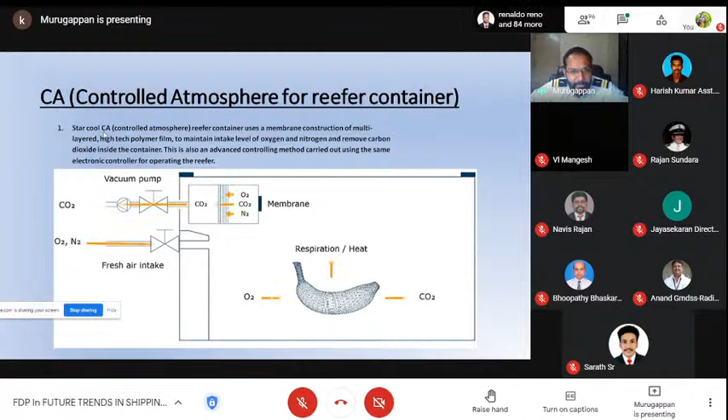And super freezing containers are also being used nowadays. These super freezing containers, which you can see in the reefer itself, can be maintained at minus 20 degrees to minus 60 degrees, and have 3 compressors, 3 evaporator fans and condenser fans also. Sorry.

Nowadays, with COVID-19, everyone knows there is a very essential medicine required which has to be maintained at minus 70 degrees. So when transporting the medicine from other countries, the shipment has to be maintained at minus 70 degrees all the time. If the temperature is not maintained, the medicine is going to get damaged. And I just read an article that if the medicine does not maintain minus 70 and the temperature rises, it should not be used for any person, and it should not be cooled down again and used for a person.

If it is used, it can have a major impact on the person who is injected with the high-temperature medicine. So in this way, this is going to be very useful also. And every piece of equipment here is controlled by the controller. Normally we have only one compressor, one evaporator and one condenser fan, which is the normal method of running the equipment to cool down the system. But this is advanced, having many components to reduce the temperature.

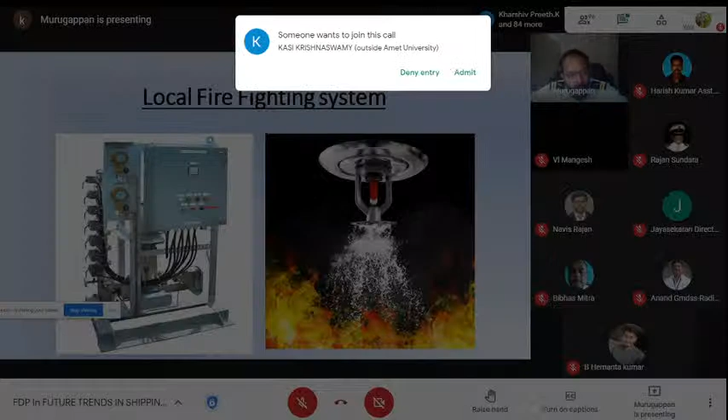If both the sensors activate together, a fire is there and smoke is there, then what will happen? The control is given to the auxiliary of the local firefighting system. This is the local firefighting system, which has a separate pump and a motor with a separate solenoid. Actually, the use of the solenoid is: in whichever location the fire has happened, this solenoid will get energized by this controller. So it is going to put off the fire by using a sprinkler. We'll just see how it is going to put it off.

As we said, if it happens during the night time, if two fire sensors like a flame sensor and a smoke sensor detect together, it will start to spray the sprinkler by the auxiliary contacts of the fire detection system to the local firefighting system. It is set in that way. So the major places where fire could happen are the boiler, above the generator, above the main engine, and the incinerator and purifier room. These are the places where we have oil, oxygen, and heat material. So the possibility of getting a fire is very high. So the fire detection system is going to detect properly, and then activate the sprinkler to put off the fire. So even without human presence, this is going to happen.

So this also comes in the small part of the control system for advanced control for the shipping industry. Actually, this system was implemented very long back, but it is still in the modern ship. So I just want to inform you.

And the speed control of the motor. Actually, most seamen will know about the speed control for the mooring winches. Normally, in the olden days, we used to operate the mooring winches with a hydraulic operating method, where the motor is there and the hydraulic system operates the mooring winches. So the ropes are sent for tying the ship to the jetty. Then later on, what happened? They tried another method, the pole changing method. The motor's poles can be changed using contactors, relays and timers.

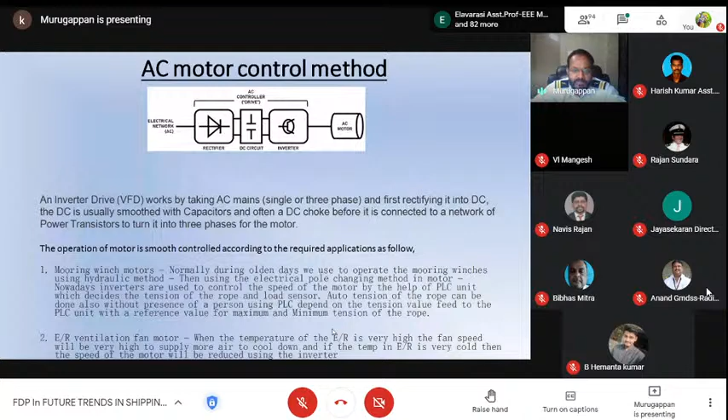So they decided to run the engine room ventilation fan to maintain the temperature in the engine room. This is a small thing, but it has many impacts inside the engine room. That controls a major part in this controlling of the motors.

Okay, and we go to another topic, the refrigeration leak system. On ship we have the air conditioner system, the provision system, and in the galley we have the reefer freezers, and the places where we store the refrigeration bottles. If anywhere there is a leakage during the night time or the person is not there, they have to know there is something wrong with the refrigeration gas. Similar in our house, we have AC. Mostly before we had R12 or R22 gases, which are very harmful for human beings. Nowadays they have stopped these gases, but still some places are using these kinds of gases, which are very dangerous for the ozone also.

So when there is a leakage of the freon, the sensor has to detect it, right? So this is the sensor, and it detects the level of the leakage and gives an alarm. The alarm monitoring system gives it to the engineer rooms, and they will approach the location, and if it is possible to stop the leakage, they can do it. So this is also a part of the control, how they measure the leakage, and that is controlled and monitored from the alarm monitoring system.

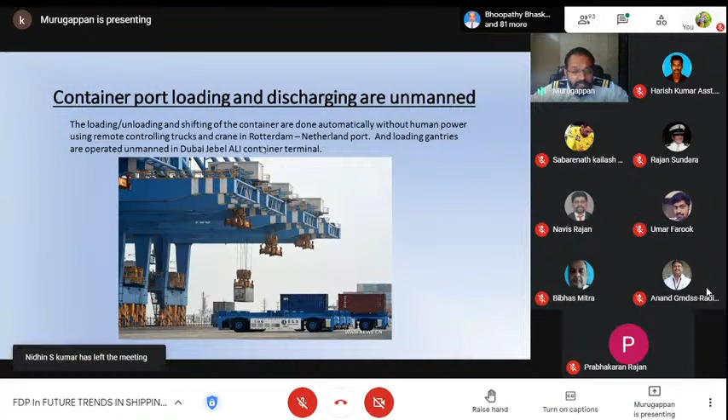The crane also, the loading and discharging crane, I have just seen in Jebel Ali port carrying 4 containers at the same time with a sensor detecting how to heave up the containers, and this loading and discharging of containers is also being done with remote operation. Sometimes if the ship is not urgent in loading and discharging, they will just drop it as an automatic control, and they will leave the location, and they can stay anywhere and control it by remote control or some software and applications. So by this way, the advanced control system is going to be very useful for the human being as well.

Actually, I just thought of playing a video. I tried to find a video. You can just see this short video because it looks good, and I feel it's good to show you also.

That's all from this video, and some of the control circuits which I have seen here. We have seen a lot of control systems that are going to be implemented, and useful for humans. Main engine related control systems also, if time permits, let us discuss very little, fast.

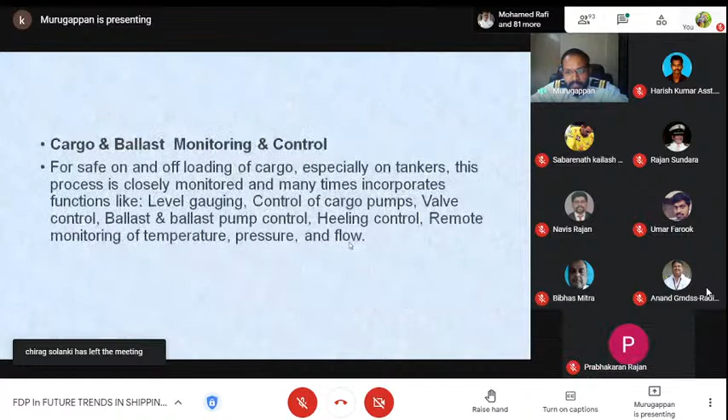Actually, for the control system, we have a control system in the main engine. One second, I think a video is playing.

We have seen for many systems how it is going to be helpful for the advanced control. Now let's see a few words about the main engine, how the control system is going to help with electronic sensors and automation. This kind of thing is helpful for an unmanned ship, and nowadays autonomous ships are available also. I'm not going to brief more about the autonomous ship, but I'll just give the current situation.

Actually, there are some ships already sailing in the sea as autonomous ships without a human being, but this is not going to work 100%, because a human effort should be there at least a few percentage. Without that, accidents can happen, and the transportation of the shipment is likely to be delayed. So they are trying also, and slowly they will be getting some information about the drawback sectors.

During the night time, you just select a button and go for a good sleep, and duty engineers will be getting the alarms. Only duty engineers are going to get an alarm, showing what kind of alarm is displayed in this cabin, what equipment has a problem, and what kind of alarm it is. The necessary action isn't given directly, but you have to be present there to know what the problems are and the rectification you have to carry out.

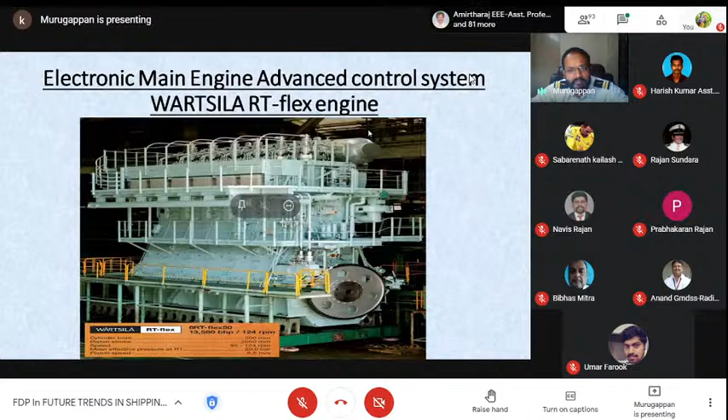We'll just see what are the components of the hydraulic system in a brief manner. I don't want to elaborate, it takes a very long duration to describe this engine. For this engine, the major part is going to be the electronic unit for each unit.

Each unit is going to have a separate PCB, called an FCM20, that is flex control module, which is going to control the activities of each unit separately. Each FCM electronic unit is also going to be helpful for communication from the bridge to the control room, from the control room to the engine control, and from control to the local control also.

This PCB is going to be helpful, and all the sensors are going to be connected with these PCBs for the safety and control of the engine, but not a few other sensors like leakage sensors or some other sensors which are not relevant to safety and control. Those are not linked with these PCBs.

So what are the major components? We need fuel, right? So we get the fuel to a supply unit, which is going to pressurize the fuel, and it is going to give it to the unit. Before giving it to the unit, what is happening, I will describe in the next slide.

And also a control oil, which is going to be helpful as control oil and servo oil, which is going to help in pressurizing the exhaust valve. This is going to be the exhaust part, just opening and closing. What is the need of this exhaust?

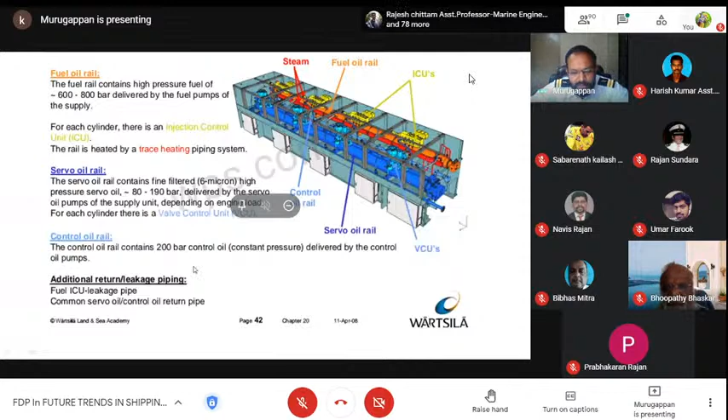Actually, this is the fuel supply pump which I was telling you about. What are the electrical components and how it is controlled? I'll explain. These are separate individual pumps - we have around 6 pumps in this system, and each pump has a separate temperature sensor.

If the temperature is less, it will alert the alarm monitoring system that this particular pump's temperature is low. How can it be low? If this pump is not operating, the temperature will be very low. It can be very high if something is really wrong with the mechanical parts inside the pump. So the temperature sensor lying in the pipeline will give an alarm and control the engine. If it is very low, that will also affect the engine control.

In case of emergency, say there is a huge fire in this location, you can directly shut down the engine from the bridge or control room by pressing a button, or you can activate this solenoid. Physically, you can just press this to shut down the engine.

By pressing this, what happens? The complete pressure of the pipeline will drain to 0. So for maintenance, safety, and control purposes, we normally have a solenoid in all kinds of ships, but I'm explaining how it has been implemented in this model of ship.

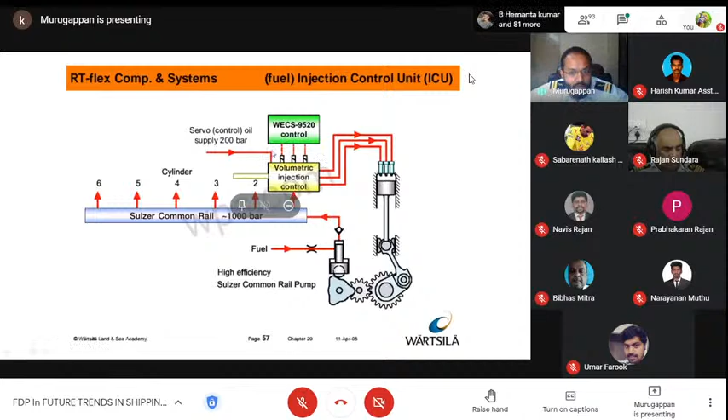So this is the simplest way of explaining the previous fuel system, which has a lot of sensors, pressure sensors as I said, and control, and actuators, which is a small governor motor. In older ships we have a bigger governor motor, a DC motor with brushes. Most of the time the brushes get damaged or the moving parts sometimes get stuck. But this small equipment is very easy to replace. The actuators are very small motors, not huge ones.

So this is being controlled by the electronic units, each unit like FCM20. Actually the engine which I was working on has 11 units. Units 1 to 4 control the actuator motors to inject the fuel and reduce the fuel according to the RPM and the speed order given from the bridge.

Actually this is the system which I was telling about: a solenoid on the ICU, and down below is the pressurized pipe. As I said, the fuel is sent through this way by energizing this solenoid. So how is this energizing happening? There is a separate sensor near this ICU injection unit, the fuel quantity sensor. How much fuel is sent into the engine is decided by this sensor, and the feedback is given to the electronic unit, and the speed is controlled according to that. So by the feedback, the solenoids are energized.

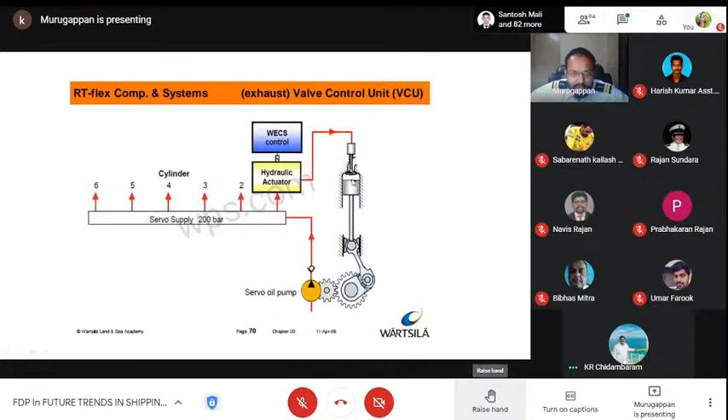And this is a similar simple view for the servo oil, which takes the control from units 1 and 2 of the PCB. FCM20 unit 1 and unit 2 decide how much pressure there is. Then the other electronic units are connected in series, where all the electronic units are fed with particular software, and all the parameters are set inside. So if these 2 units become defective, the engine cannot start, and the control system will stop the engine to avoid accidents.

And some other, as we spoke, control system is going to be the main part from bridge and engine room, and safety related and governor actuator is going to be helpful, and alarm monitoring system is also going to be helpful to monitor the situation. Okay.

Safety system activities like slowdown and shutdown in case of the overspeed or other abnormal activities in the engine or its auxiliary equipment. We are just speaking about the main engine only, but still some other auxiliary equipment which is linked with the main engine also will be affected if there is something wrong. It can overpressure or it can make over temperature.

So for this, all complete system is going to be connected with a bus communication system to the control room with the monitor. Before control room monitor, we are having an additional system. We'll just see about this system, which is helpful to troubleshoot the problems very easily. Before that, we'll just see 1 or 2 slides.

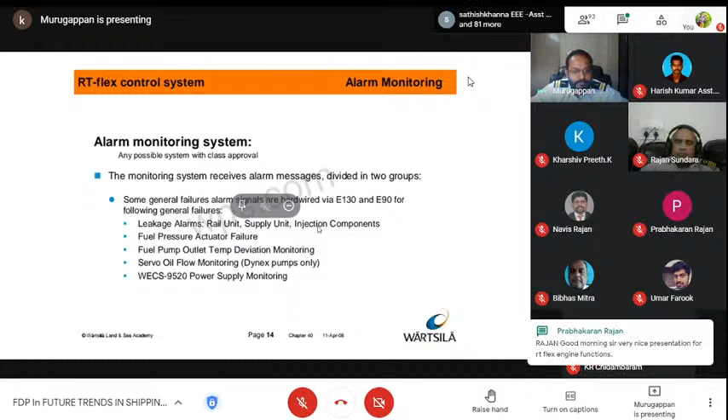If any one PCB is going to get defective, the engine will not be starting. So for replacing that PCB, you cannot just replace with a new FCM20 PCB. The one which is in the online spare, which is being connected with all the FCM20, is having the software and all the parameters which are common for all the units fed into this unit, ready, available to just replace the defective one.

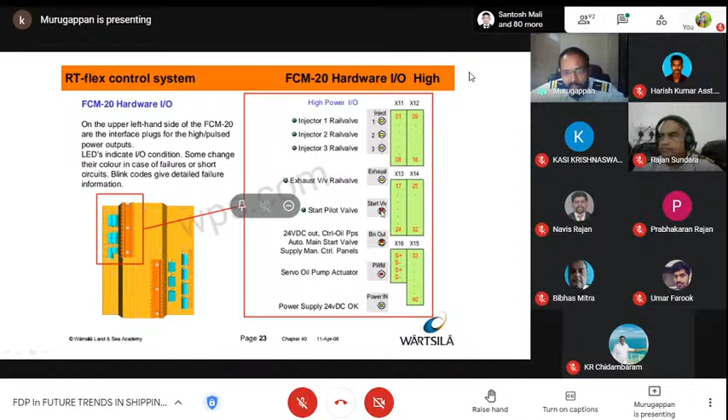If the starting air has been sent inside for pushing down the piston to make a cranking effect, then it works in the yellow light. If starting is not being provided, it works in the red light, so we'll know this is the problem, and we can directly go for this particular problem and check whether the starting air is sent to the solenoid or not. If not, something is choked, and we can just have a look.

And in a similar way, there are many alarms. I don't want to elaborate on all the alarms. Cranking angle sensor 1 and 2: there are 2 sensors, one is standby and one is the master. You can change the sensor also. Every periodic duration you have to change them one by one to check whether it is working or not. And the fuel quantity sensor gives the feedback of how much fuel is given into the engine by the ICU unit, and accordingly the injection process is done.

Down below you have a power supply unit, and whether the module of this particular unit itself is working properly or not, we can view from these LED lamps. The CAN bus is useful for communication from the bridge to the control room, and from the control room to the engine, to the particular units and to the local control also. Whether it is working properly or not, just by viewing each PCB you can identify it very easily.

And as we said, fuel is pressurized. We already set the fuel from the command from the bridge. It works with a PI controller. It is just a small PCB which decides the pressure and the current. By that, the command, the ship movement, the RPM is decided. This is a small way of explaining how the fuel, pressure and current are implemented.

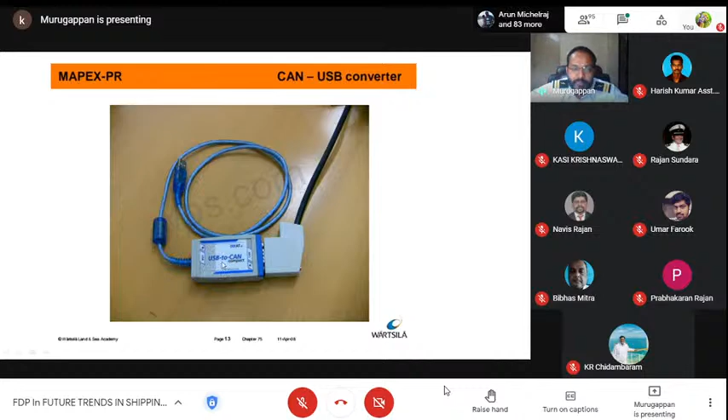So the sensor, in a digital way or analog way, is going to read the value, and the speed loads are all going to be read in this electronic unit. And this is going to be the CAN bus, which is going to communicate with each and every PCB. This is the image of the CAN bus.

And I'll just explain what parameters you can view from the computer in the control room for the main engine alone. It is not going to be connected with any other auxiliary equipment. You can see the rail pressure, the fuel rail pressure I was telling you about, right? It is 800 bar. So if the engine is going to reduce the pressure, there are two sensors, 1 and 2. If one sensor is not working, it will intimate the alarm down below: sensor 1 fuel is not working properly. So with the other sensor, the engine can still work, but you have to resolve the problem with the other sensor.

So control oil pressure is also being read, servo oil pressure is being read, charging air. The engine has to be pressurized, so charging air is being read. And the engine command, what command is given from the bridge, is being read. Engine RPM, what RPM is being given from the bridge, is read here. And the injection process, the injection on time and frequency, sorry, fuel quantity, how much is being sent, all are being read here. Okay. And the number of nozzles, how many nozzles are used for injecting the fuel to the main engine, can be viewed from here.

And in an easy way, with the color coding, you can easily find what alarm that is. Is it a passive alarm or critical alarm, or is it just an alarm for the rail unit alone? Depending on each color, you can find out if it is a critical, major or minimum problem. For the normal start stop and ordering of the speed, you are going to have it in green. For the critical, you are going to have it in red. For the passive alarm, which can be solved anytime, that is given in yellow. This way, you can easily find out the problem.

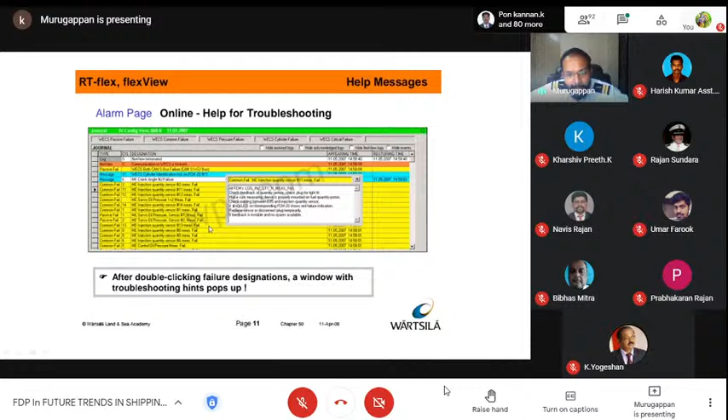Actually, in my career, I have faced a lot of problems in the RT-flex engine, which was very useful for me, and day by day I get a lot of problems. So I am getting a lot of experience in that way. Hope everyone will also get the same experience when you go on board.

And also you can change the values. As I said, your exhaust is going to open and close the piston. Sorry, not the piston, the spindle. Even when the main engine is stopped, you can just directly press the particular unit you need to open and close. After maintenance of the particular unit, you have to confirm whether the exhaust is opening or closing. By changing auto to manual, it can be changed to close or open. So just by clicking the button in the control room, you are going to operate one particular unit's exhaust, which is very heavy to operate, but it is still done from the control room itself.

The same way, the blowers. As you know, the engine has to be pressurized with the blower. For the starting and stopping of the blower, if the engine is running at rated RPM, the blower will be starting and stopping at the critical RPM. If the engine is running at less RPM, the blower motor will keep running to pressurize. If the engine is running at very high RPM, the engine is pressurized by itself using a turbocharger. So to cut in and cut off the blower, we can just change the value from here.

It is a pressure transmitter value. The pressure sensor is going to read the value from the main engine. By just changing the value from 0.2 to 0.45, the blower will be stopped. So this auxiliary control is given to the blower control circuit. So by just changing the value, the transmitter is going to give the value here, and this is going to feed the blower. You see how the control system works: just a small change in the value in the computer is going to make a big change in the engine.

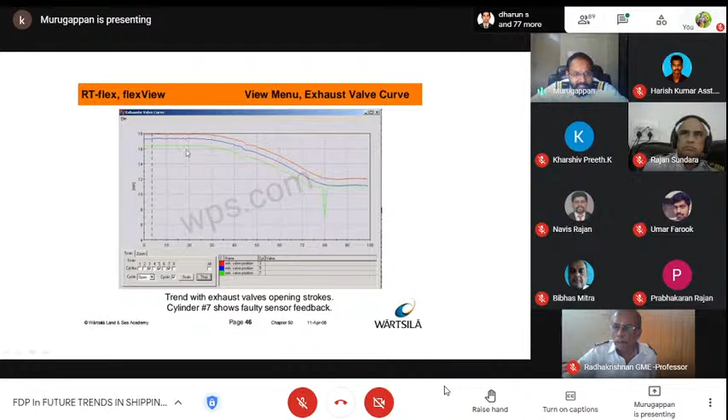This way, by the way, you can see the graph also. As we said, the exhaust opening and closing, how it is opening or closing. You can see the green graph has just fallen down. It has not been opened properly. So you can know there is something wrong in the movement of the stroke moving up and down. So by this graph you can see in the computer itself. You can decide what is the exact problem by this graph.

Each and every graph should be nearly linear to each other. If there is going to be a big change, then that will give you a solution: this unit is having a problem with the electrical or electronic or the mechanical part itself. This is going to be the injection for each unit. For each unit the color is different, so it is showing how the fuel is being injected.

And we spoke about the exhaust piston moving up and down, right? How is it going to be shown on a computer in the control room? There are two position sensors, 1 and 2, for safety purposes. If one is not going to work, the other one can still operate. If both are not going to work, the engine will directly shut down. If one is not going to work, the engine will slow down only. It will not let the engine run more than the rated critical RPM. Okay.

So by this value, you can see 11.9 and 11.0. Mostly all the values should be equal. Actually, the sensor is going to read from 4 milliampere to 20 milliampere. By movement of this piston, it is going to read. If there is a big change in this value, then you can know this sensor is defective, which one, sensor one or sensor two, or the piston moving up and down, maybe the carbon particles made this piston, the spindle, get stuck inside.

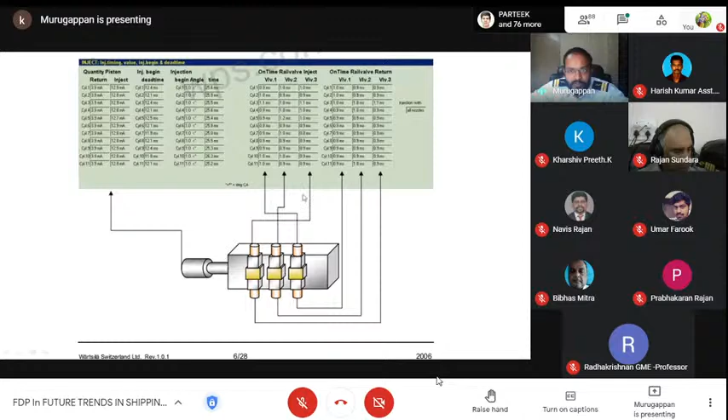Now we can change the values. Just select that unit, press shift and the arrow button, and you can change the value from run to cutout. The fuel can be cut out for a particular unit. Even if there is a possibility for the unit to be shut out completely, you can do it by pressing fuel cut, using shift and arrow, and shift and enter.

You can cut out one unit's fuel, but actually only the fuel has to be disconnected. The lubricating oil near the piston has to be given all the time, so that should not be disconnected. Only the fuel is disconnected to avoid the combustion process. This way you can do it in the computer, in the control room itself, with no need to go down to close valves. That is the old way of doing it.

We already spoke about this, and also about the injection correction factor. How much percentage of fuel you require to send into the unit can be entered here.

If the unit is replaced, cylinder, piston, and other parts are being replaced as very new, then you don't inject 100% of fuel, you can change it to 95%. Sometimes if the unit is not injecting properly and the exhaust temperature is not going up properly, you can inject a little more fuel than 100%, like 105 or 110. You should not go beyond that limit.

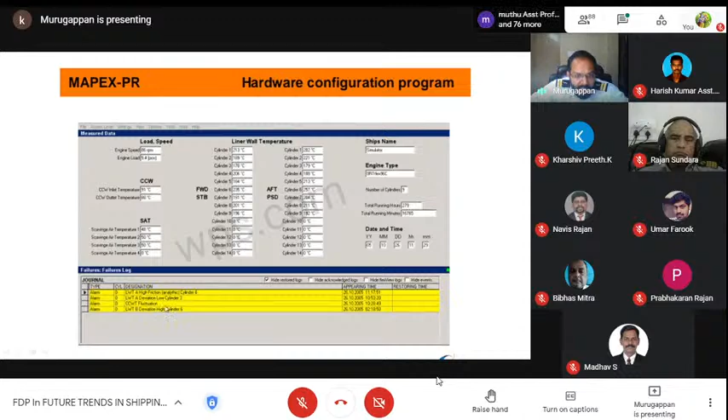Actually this will not give an alarm, as I understood, for high friction. It's giving the alarm in the flex, so it will be in the alarm monitoring also. Sorry, I made a mistake - it's the cylinder lubrication system. Yeah, okay.

We'll just look at the cylinder lubrication. This is going to be the cylinder liner where the piston moves in this location. Around this, you are going to inject the lubricating oil. How are you going to inject the lubricating oil?

With a separate component that is going to be linked with a PCB, which I was telling you about. The separate unit has a separate PCB, called the FCM-20, flex control module. This is going to be connected with that PCB, so you see, all of them are going to be interconnected. The control system is set up in that way. If any problem is happening in this place, the engine should not be started, or the engine has to be slowed down. This way the engine is protected.

You can see this spraying of the lubrication - we will see the next part and understand. The oil is going to be taken from this tank directly through a filter and comes by gravity. Then it is given to a component - as I said, this is the component - and it comes till this location, then it is given to the cylinder.

So how is it given? It's just coming by gravity, but it cannot go through the main engine by gravity alone, so it has to be pressurized also. How is it pressurized? This is the component I was telling you about - the bottle. This is a bottle pressurized with 30 bar of nitrogen gas, which helps push the oil at 30 bar of pressure for the lubrication purpose.

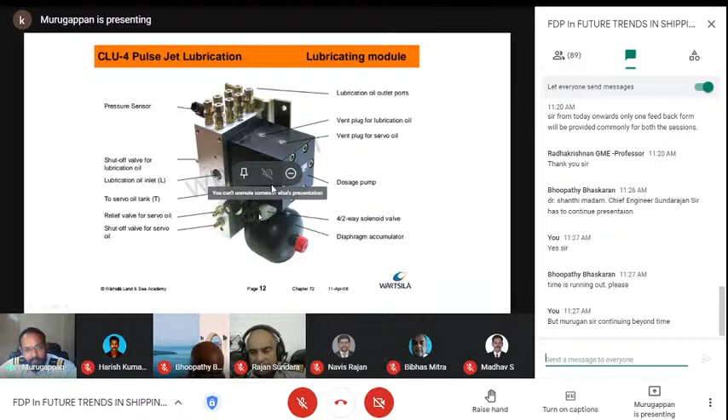In the electronic engine, each unit's PCB has to give the signal to energize the solenoid so that the injection is given, and the pressure sensor is going to read pressure. If there is less pressure being injected, either the sensor is defective or the timing of the signal given to energize the solenoid is not proper. This way you can approach the exact problem and avoid damages.

If any one of the units fails to inject lubrication, the engine will never start at all. There is a non-return valve in this location. One non-return valve was not working on one of my ships, which stopped the ship and didn't allow the engine to start at all. It triggered an alarm and safety shut down the engine directly, so it could not start at all.

So this unit has to be working for all the units. Even if you want to switch off the fuel for a particular unit, the lubricating system has to be working all the time.

Excuse me sir, Murugan sir. Yes madam. Next guest Sundarajan sir is also waiting, sir, more than half an hour. Okay madam, just give me two minutes, it's almost finished. Okay sir, thank you.

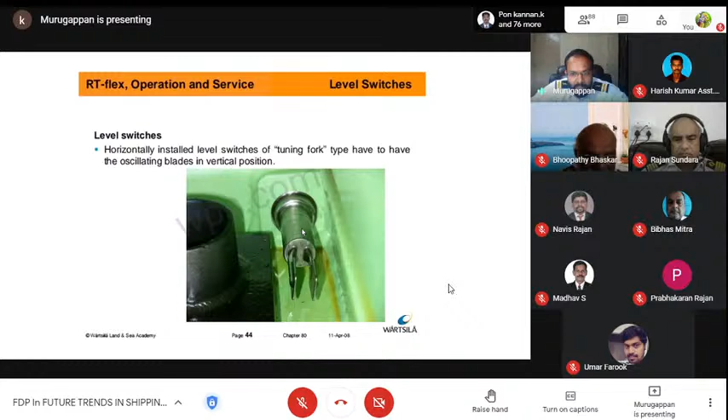As time is short, I cannot explain a lot about the main engine. These are the main important systems controlling the advancement in the control system. Day by day, it is not going to stop at all - they are thinking innovatively and trying to get new advanced systems which will be very useful for human beings and safety on ships at sea.

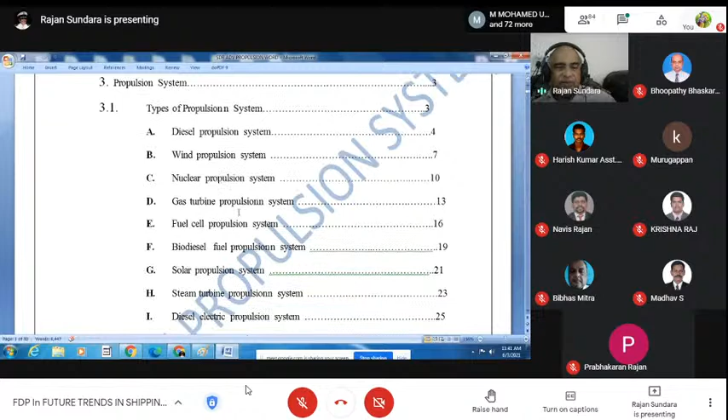The future advanced propulsions - without telling what is in the back, I can't talk about the future propulsions. Now I have given here the types of propulsion: diesel propulsion, wind propulsion, nuclear propulsion, gas turbine propulsion, fuel cell propulsion, biodiesel fuel propulsion, solar propulsion, steam turbine propulsion which was there earlier and later converted into LNG, and it was surviving for some more time. Diesel electric propulsion, water jet propulsion, gas fuel or tri-fuel propulsion - these are the ways the propulsion has gone through a long way.

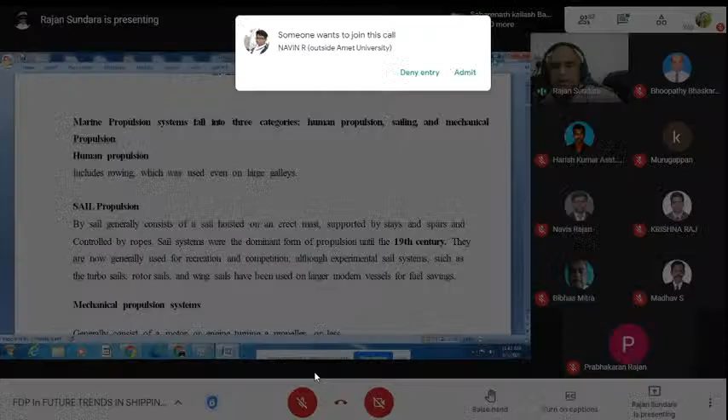How is it possible? You can ask, and that is what is going on nowadays. There is no diesel engine, there are not going to be steam engines, there are not going to be GT engines, gas turbines like that. So these are the things I wanted to explain before, and I'm going back to this.

I'll come back here. Earlier there was sail propulsion in the 19th century, and before that it was human propulsion. The propulsion includes rowing, which was there even in the very, very long days. Thereafter sail propulsion started in the 19th century, and later mechanical propulsion. In mechanical propulsion, we are still there, and there is going to be an electronic type of propulsion in future days. In this mechanical era where we currently are, these ships will go for another 10 years or something. If we can see all the propulsions involved, it is beyond everybody's imagination. So we have got many specialized variations such as contra-rotating propulsion, called CRP.

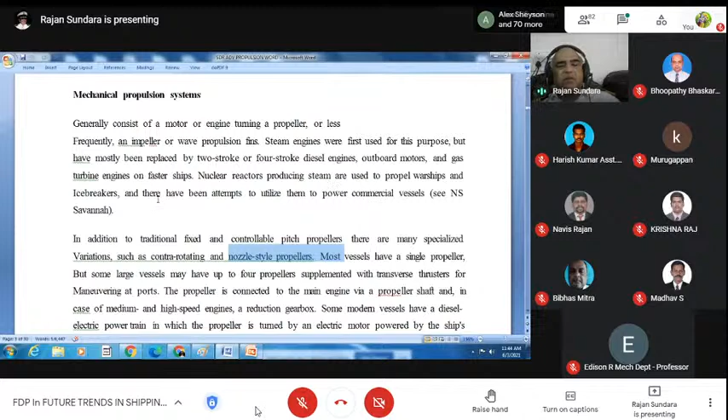It's called CRP, nozzle propulsions, single propellers. All these things are coming into factor. Now if you can see, these are the propulsions: impeller, wave propulsion fins. Steam engines have mostly been replaced by the two-stroke engines, later the four-stroke diesel engines, outboard motors, the gas turbines, faster ships, nuclear reactors, steam turbines. Again, the nuclear are operated by the steam, used for the warships and icebreakers, and there have been attempts to utilize them for powering commercial vessels, which we can see in a later stage.

Right? Principle of marine propulsion has gone a long way, which is not necessary now. I told you these are the things which are going to be extinct. There will be no propulsions like this anymore. There will be no shafting also. All will be electrically controlled propellers, which we'll also see, right?

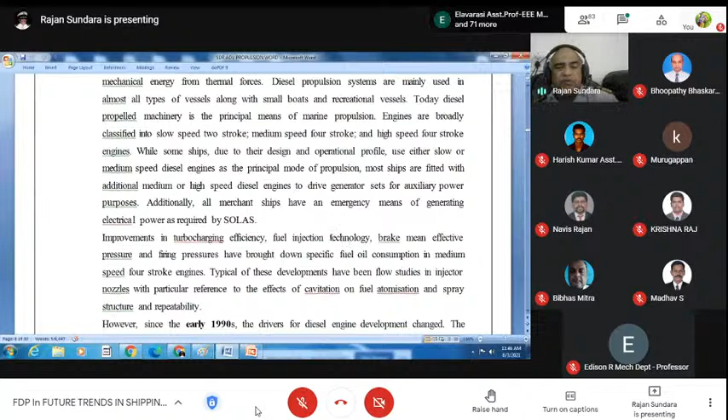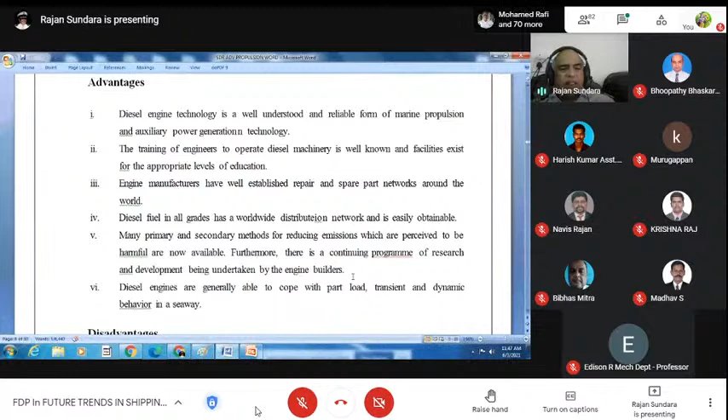I have put some advantages and disadvantages for the cadets to know, as they will be studying in future. And I wanted to go step by step into wind propulsion. Have you ever heard of wind propulsion, the Flettner rotor? This is the Flettner rotor, which has got no power at all, using the wind. Flettner rotor propulsion, if you can see here. I'll come back to that when I have it here. I'll show you that shape.

Yeah, I'll show you a little later. The Flettner rotor using the wind power, it is like sails, and it is kept on the deck, and because of the force and all, I'll show you that. It's very nice to look into. I'll show you exactly the Flettner propulsion here.

Right. Before that, I would like to go into another propulsion. It's called water jet propulsion. The operation principle of water jet propulsion is that water is drawn through the ducting. In olden ships, VLCC and all, we used to have a scoop system. Even the chief engineer who was working on that ship, GT Damawand, I believe. We have a scoop system where the water is drawn in through the internal pumps, adding energy, and the water is expelled at a high velocity. This is what is happening.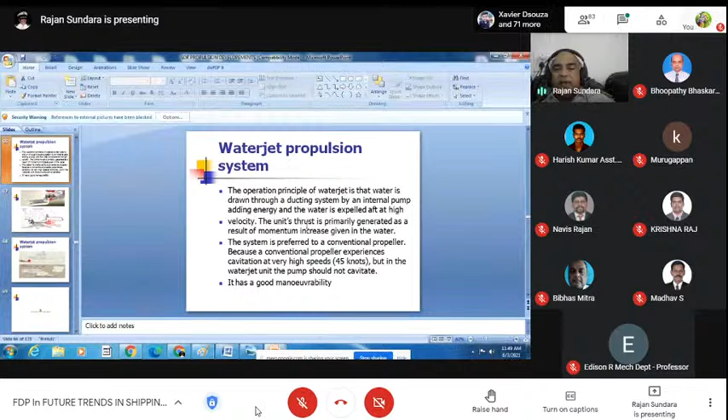I can show you that on a video, right? Madam, can you see this video here for me? Yes, sir.

Yeah, this is the water jet propulsion. You can see here it's an axial flow pump. The water has been sucked like a scooping method, and it has been delivered under high pressure. And you can see the modularized interceptor, easy to retrofit, and everything removed: no shafting, no turbines. All right, and you can see the nozzles here.

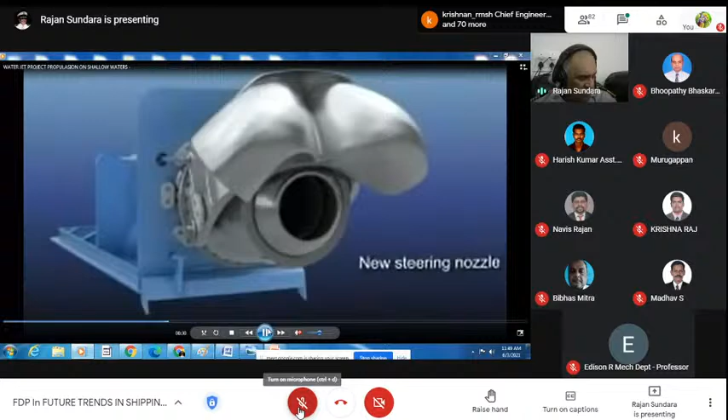Water jet is pushed through the nozzle, and by the reaction force the ship will be moving forward; the thrust happens in the aft, the nozzle moves port and starboard, and a cap will be there to go for the astern movement. This is called water jet propulsion. You can see the nozzle turning from port to starboard side, and if I want to go astern, put down the nozzles, or turn the ship to left or right.

Many passenger ships nowadays are going to use this, because there is no noise, there is no pollution, and they are going to use the water jet propulsion for ferries and cruises. This is going to be the smoothest way, and it is going to give you about 25 to 30 knot speed also.

Is that clear? Yeah. Okay, right.

Here, this is one of the propulsion, and another one which is called paddle propulsion. This is called the paddle propulsion. On the right hand side you can see the joystick where we can move. When I'm moving ahead, the motion is in the forward. The thrust is created by the paddle by pushing the water aft. This is like a fish pushing the fins,

and you can see the thrust, and the motion is in the opposite side. When I'm putting it astern, the thrust is going to be in the forward, and the motion is going to be in the aft. That is how the blades are moving. It is called paddle propulsion. This one is a paddle propulsion. This also is going to have an enormous effect on the tugs and everything in future.

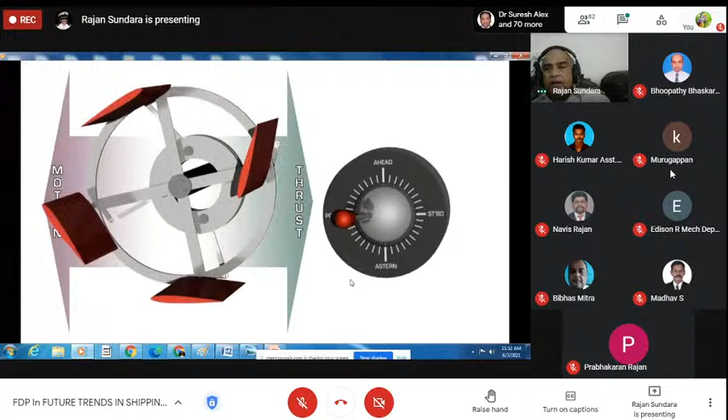So these are the things which everybody should understand, and this is the latest one, which is called azipod propulsion or azimuth propulsion. Azimuth propulsion is going to give a 360 degrees turning. There is no rudder. There is no main engine. Okay, we can get inside. We can get inside even the engine and using the electrical power.

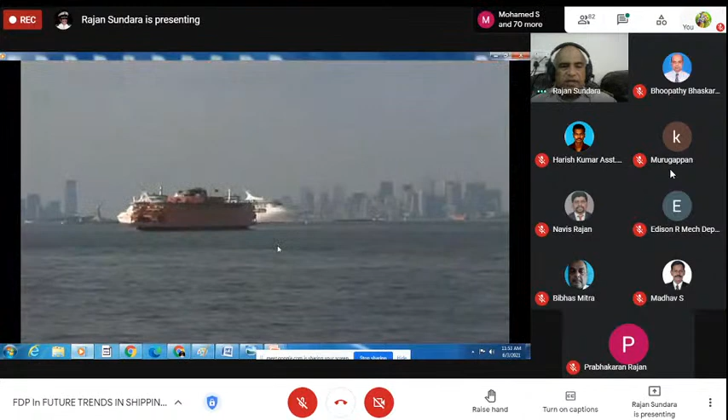You can see this is powered like this, very efficient, and the best part of it is that we can interchange within hours. We can change the whole assembly, get it outside, go for the AMC. They will come and fit it up and they will go off. This ship, we have one ship like that with us, the research ship in Goa, and we have used this one.

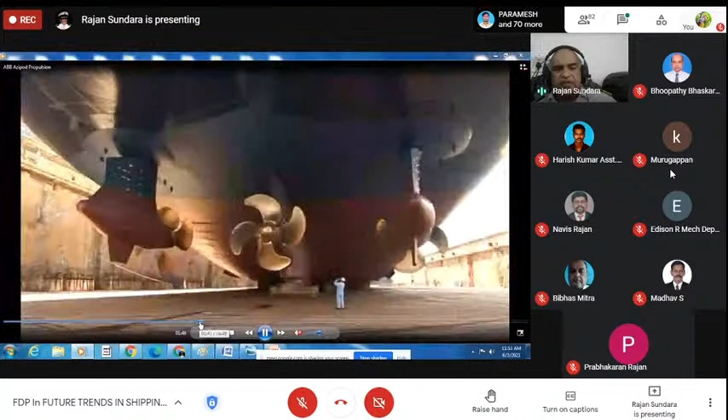Now you can see this. This is called azipod, and you can see this shape, the shaft and all. You can see internally there is a motor there, which you can see how best the modification has taken place, and there is no rudder, there is no engine. Now when you look at this, wait a bit, I'd like to show this to the boys, to the cadets here. All right.

Okay, sir. Yes. Here, this is where the people can come inside. The people can come inside. Here is a motor, here the motor is fitted, and the powerful cable is going to come inside. When the cable is coming inside, that is going to go. The cables are coming inside and feeding these three cables. All the cables are coming and running a motor here, and that will be the power.

That will be the driving media for these propellers. For these propellers here, there are three, and you can see the changing. That is called azimuth. They are called azipod propulsions. Okay, when you see it here, you can see it clearly, azipod propulsion. All right, I will show you another one.

Okay, can you see that here? Here, this is called azimuth. Now you watch, it is going to turn 360 degrees. There is no rudder, and it is under the CPP system. The pitch can be turned. This is the future of the propulsion system, azipod system. You can see that clearly, right?

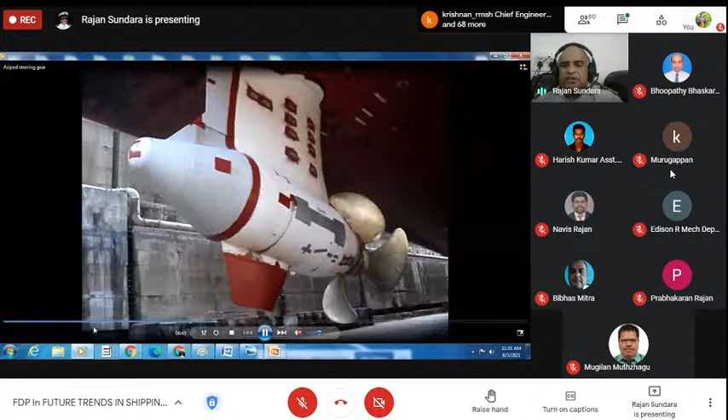The whole assembly is turning like a turret. And you've got the fins back. This is called azipod propulsion. We can have 2 or 3 depending on the size of the ship. And what is the beauty of that? When you happen to go to the dry dock, one set is already ready there. You just knock it off. The other one is put in within 1.5 days. We have the engine ready.

That is the beauty. All dry docking is going to be with respect to the engine, the rudder, the propeller, the stern tube, all removed. This is going to be the future, and all the repairs are, in a way, replaced rather. It's like a spare part taken from the unit, one will come, the same one will be fitted, and they'll take the old one and they will do this.

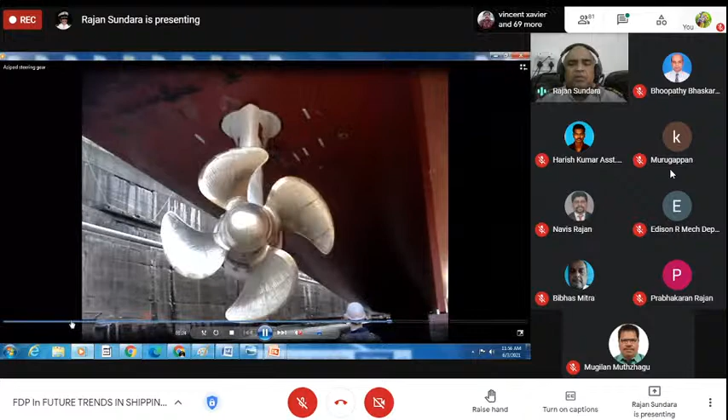And this is coming from 3 companies, Alstom, Schottel, and Siemens. They are making it like this, and this is the future of the propulsion, which is called azipod propulsion. Is that clear, sir? All right.

Right. I would like to go through some of the slides here. Right. This is what I have told you about the water jet propulsion. This is the transmission of propellers here.

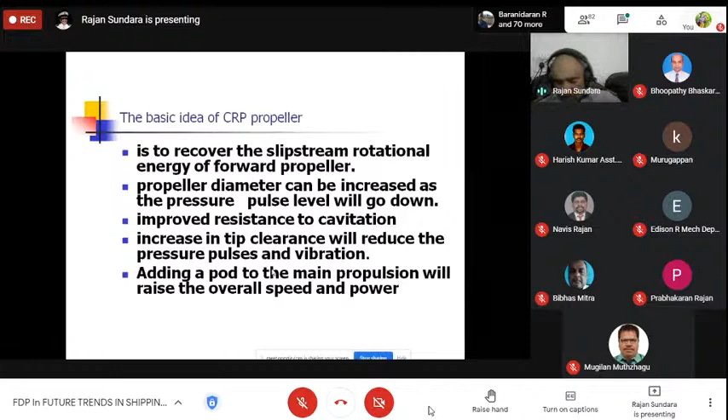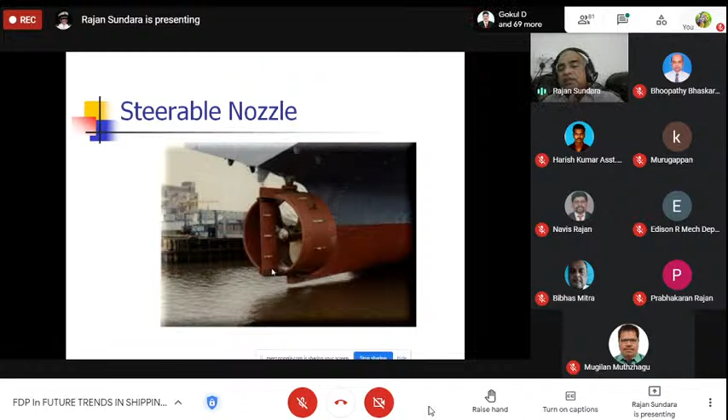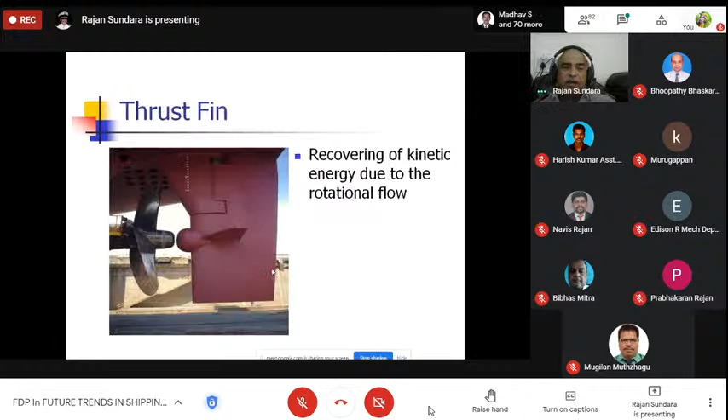So let me go into another system. These are the skewed propeller, which is plus 6% of efficiency. Thrust fin propulsion. This is also a fixed CPP system, where it can have structural changes, and the pitch can be changed. And the beauty is that it is going to give you speed which nobody has expected. As bullet trains are coming, these are the propellers which are going to increase the speed of future ships.

All right. So the electrical propulsion is going to take place in future. This is called podded propulsion, and this is the history, the advantages, current stages, and all future possibilities, which we will explain at a later stage.

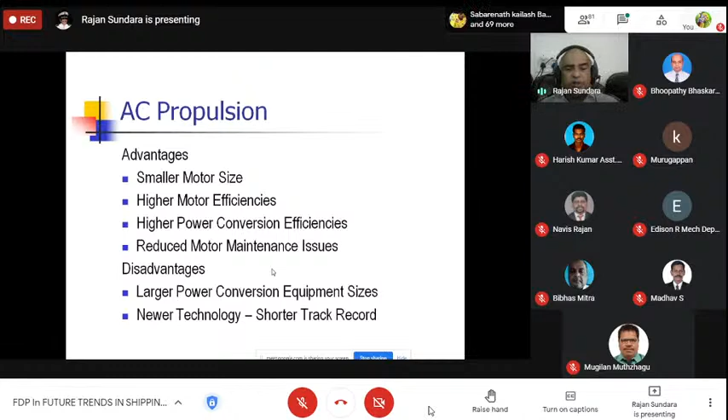Right. In 1990, a development took place in power electronics capable of handling the load and frequency variations better. QE2 was the first passenger ship to go with this sort of propulsion. 95 megawatt power stations have been using it. 120 megawatt can be installed. A smaller motor, higher motor efficiency, higher power conversion efficiency, reduced motor maintenance. All these are added advantages with these azimuth propulsions.

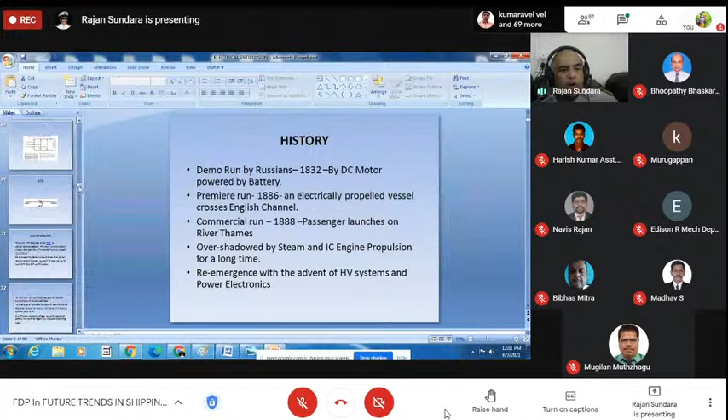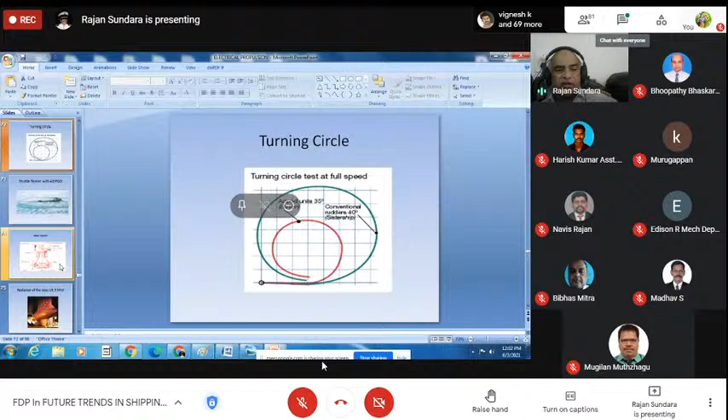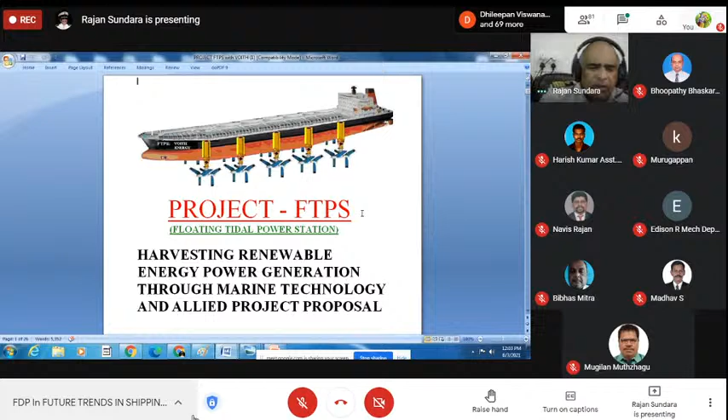All right, sir. So what I'm trying to emphasize here, there are so many propulsions like this which will be seen by the cadets in future. This is what I made in 2013 for a project, FTPS, one of the ships which I prepared for the Voith Schneider German company, right? This is the world's largest ship which I have served.

Here we can see how we can improve the efficiency using the turbines, fixing the blades on future propulsions, using the tidal power. This is what is exactly required. This is another ship, which is called FTPS, which can produce current. That is floating tidal power station, which I have termed it.

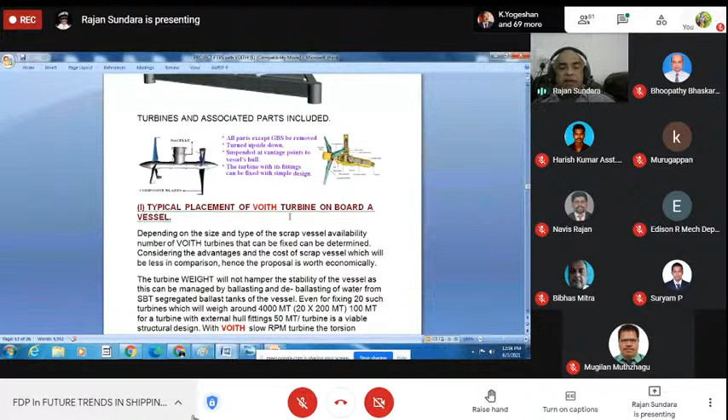There is another ship which I have designed, FFPT. That's a future one to give a petrol station on any sea. This is the typical turbine on board a vessel, and you can see these are the turbines which are all there. And in future, if the ship is stationed, we can produce current using the underwater current with turbines for power production.

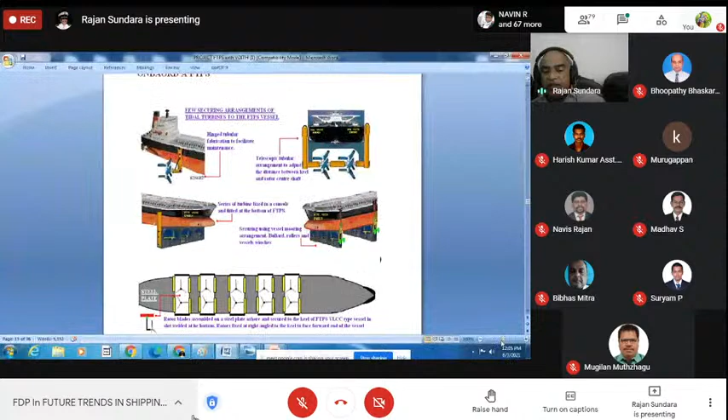We don't have to do anything. Everything will be taken care of, because this tidal power is 10 times more powerful than the wind turbines. All right. So you can see here how we can design, all the ways we can design using the turbine rotors, different turbine rotors already in existence. There are so many underwater, 1,200 megawatt to 1,320 megawatt, built in Incheon, South Korea. All these things are there.

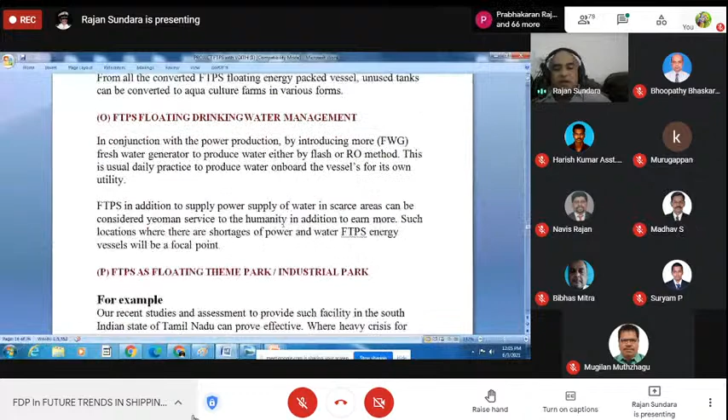In Gujarat, we have planned. I was in the team to plan underwater turbines also to produce the current, and we were having the meetings also. So the propulsion is developing in a very fast way, and that is what we are expecting it to be. And this is the meeting with Mr. Goel, and we are interested to do tidal current ships.

Now you can see the turbines, which maximize the power generation of FTPS. These are going to be the future propulsion. This is the power which you are getting from the waves also. So different types of propulsions are there, which we can discuss later when we are having renewable energy. All right, sir.

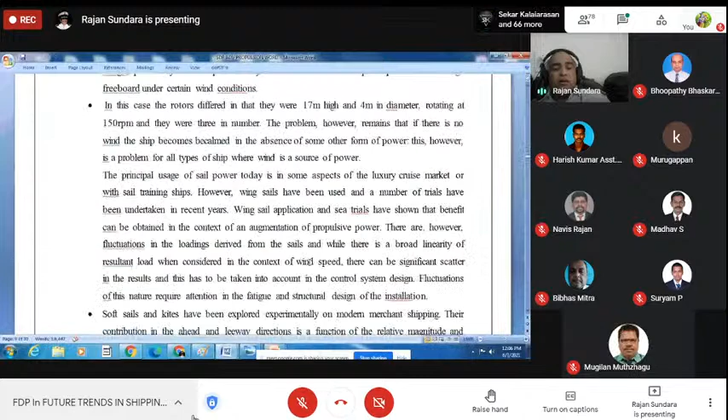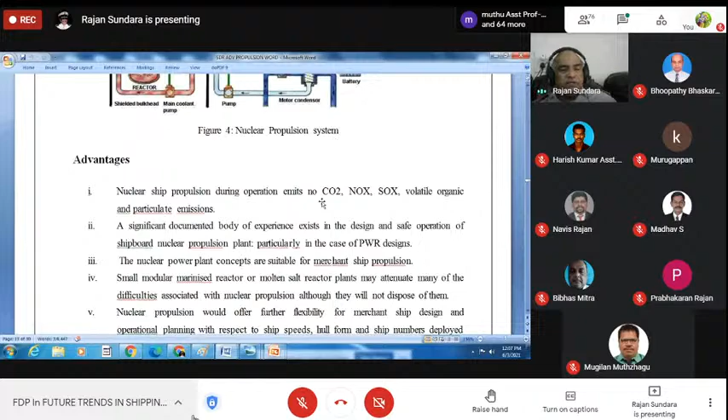This is also the future propulsion system. All right, sir. So we have got this. What are the advantages? Nuclear propulsion during operation emits no CO2, NOx or SOx, volatile organic compounds, or particulate emissions. We have got so many advantages like this. Disadvantages, and then we go back to the gas turbine propulsion.

Hydrocarbons, fossil fuels, crude oil, which is raw and not matured enough, we are converting into a matured fuel like HFO and MGO or MDO. Those things are going to go away because fossil fuels will not be there in another 1 or 2 decades. We have to go to gas, and this is one of the systems in which we will be applying such technology using these gas turbines also. All right.

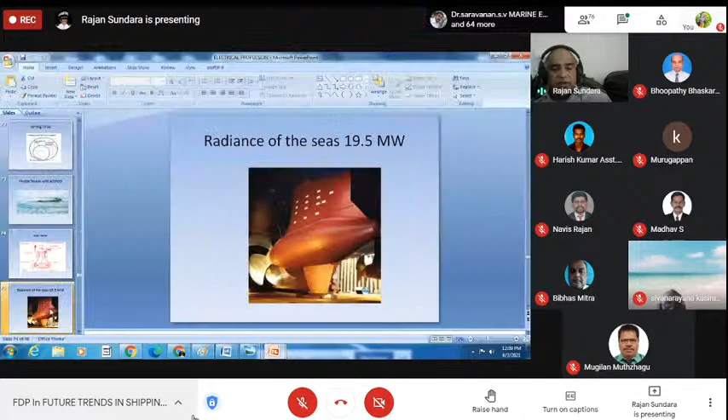All right, going back to this, again, Radiance of the Seas 19.5 megawatt, and this is the azipod. This is the one which is being supplied, which will be coming in a compact one. They will come inside to the dry dock, they will replace it, take the old one, and like an AMC, next time when you go, it will be there. So it reduces so much factor. We don't have to use any spare, we don't have to put any spare, we don't have to worry about anything, just supply the current, and that's it.

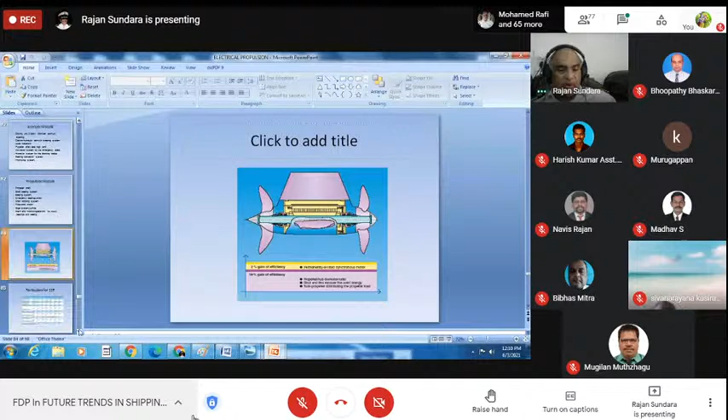Another azipod propulsion. This is another backup power. It is also an electrical powered propulsion. Okay, we've got so many propulsions ahead, and they are going to look into that. Now, hybrid CRP. CRP stands for contra rotation. It is going to rotate in the opposite direction. This is called CRP propulsion. There will be two propellers involved in this.

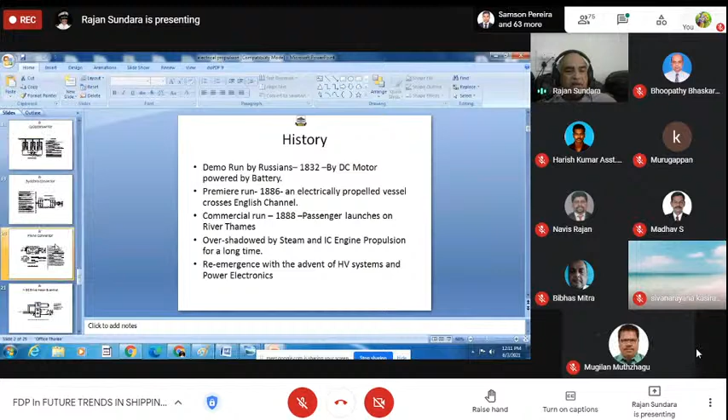All right. Let me go to another slide, because I am trying to show as much as possible so that boys can understand what is there. I'm not going to go so deep in everything, just to catch up here and there, so that when they want, we can go through everything step by step in a deep manner. We'll see that in the next class, or whenever they want to know about the future propulsion. Whatever we are covering is good enough for them to know what types of propulsion are available, what advancements are available. And a guy like Murugan is going to play a very good part in this sort of propulsion. That is what I would like to emphasize at this juncture.

I'm going to conclude in another 10 minutes time, not even 10 minutes. No, sir, continuing, sir. Thank you, sir. What happened? Yes. Sir, you take extra 10 minutes, sir. No problem, sir. Okay, I do not know whether I'm going beyond the limit, or I'm telling for the student, or for the other people. But so much material is there, so much effort, future propulsions are there. It is not going to be concluded in such a short period of time. But I would like to express the maximum. Hello, can I? I can't hear anybody. Hello, sir. Anybody? No, sir. Continuing, sir. Thank you, sir. Somebody wanted to talk. Yeah, no problem.

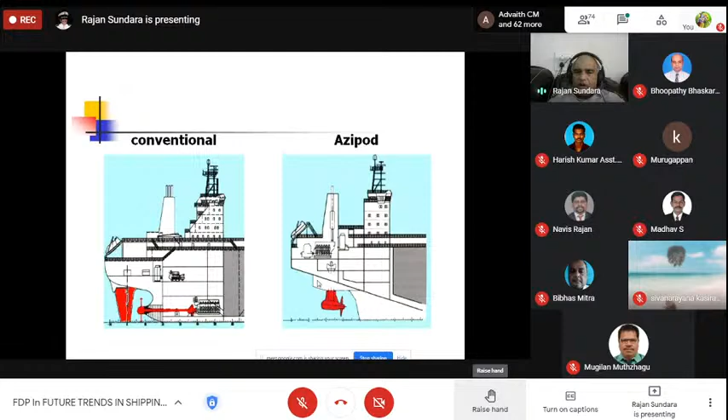Now you can see here conventional and azipod. Which things are removed here? Earlier, we have a rudder, we have shaft, we have engine, we have propeller, we have stern tube. Now look at this azipod. What we have is nothing but a propeller pod where we can get inside, only supplying the power. This is going to be the future propulsion, and everything is going to work electronically. I have got 10 such PPTs to talk about electrical propulsion, but I do not know whether that will be useful at this stage for the cadet. So let us wait and see how they understand in future how their ships are going to be powered.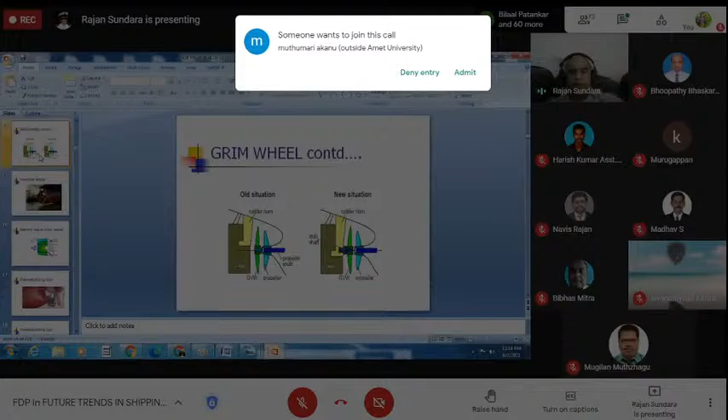Now this is the Grim wheel, another site of propulsion, and this is the modern contra-rotating propellers. You can see two or three contra-rotating propellers. It's going to give you very, very technical advantages, and this will help to maneuver and reduce the turning circle drastically to a very level degree. It will turn so fast that you cannot imagine, and we can avoid accidents this way. All right, so this is the one, and let me show you another.

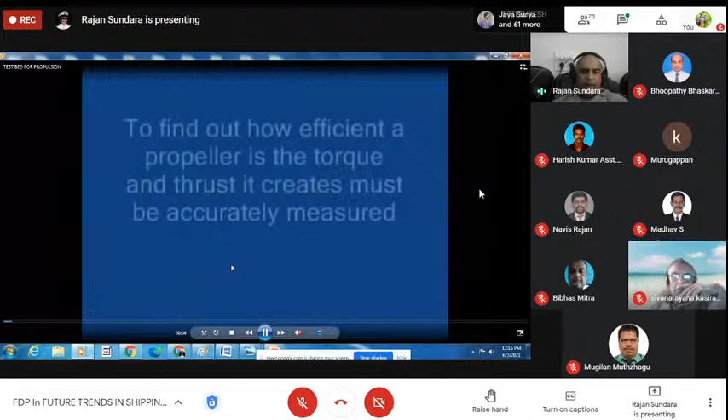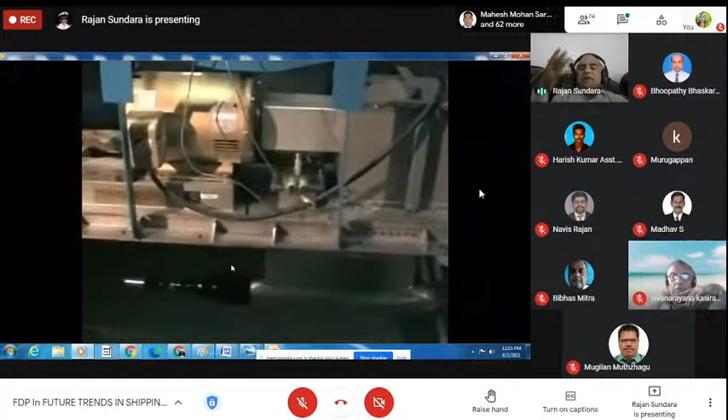When I have to design a propeller, this is what I'm planning for our college: to have a test bed and increase the research knowledge of the cadets, to have a ship hull open water test and a dynamometer, where we can design our results. That's why I wanted to show this today to the cadets, so that you get into future propulsion and the research mode of application. It is not that everybody has to go to sea and work; you can work here and learn.

Multiple times the seafarers' knowledge, provided you put your research mind into this. This sort of test bed is what we prepare whenever we design a propeller. This is the tank here, see the smallest comparison scale propeller has been used. Then we see how much thrust is produced, how much contra propulsion, azimuth propulsion, everything is done in a test bed like this. You can watch how this mechanism is going to work for future cadets, how we are going to go ahead with future propulsion systems and the research system, and how AMET can play a part in the research.

And why not our AMET students one day design our own? That is what every faculty of ours has to improve, to bring such knowledge to the cadets, to prove how good we can be, and have our own propulsion system. That is what we can do, and many research efforts in this connection - that's why I wanted to show you this test bed also.

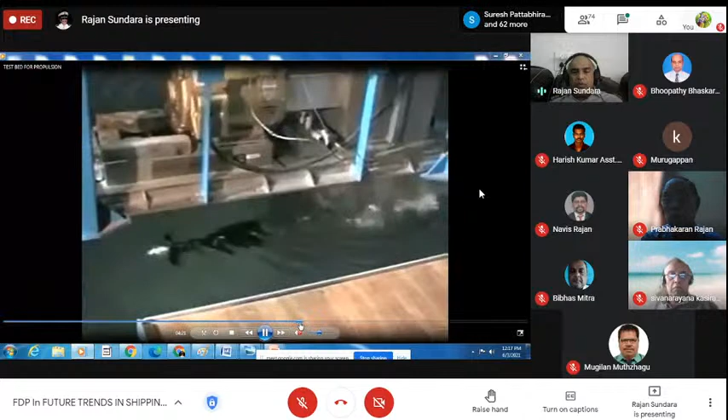So that everybody can understand what the thrust, weight, and everything we can calculate, using different sensors - this is the sensor point. We know how much thrust is created, and by this we know all this.

All right, then I hope I explained about the water jet and another Scana's propulsion system. Just watch this one - that is called CRP, Contra Rotating Propellers. See how it is, and the shaft is independent - see that 2 shafts are in opposite directions.

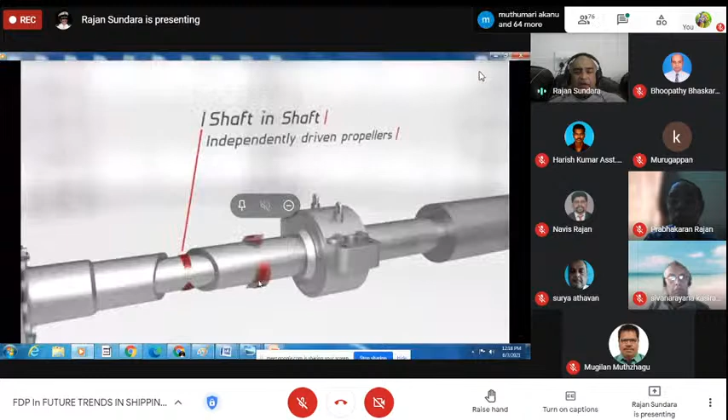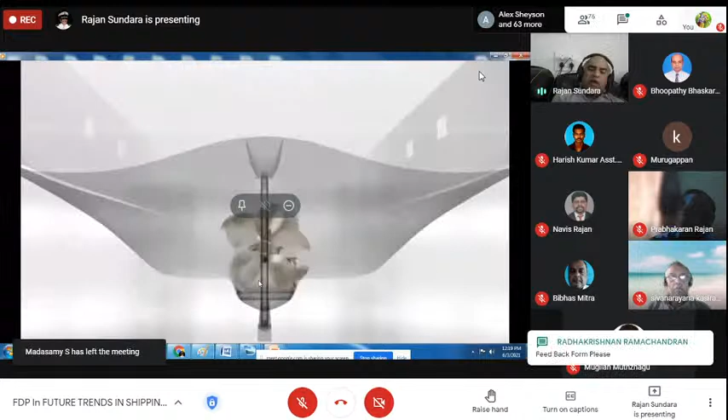See how they have built it up, and how the prime mover is acting, how high power density and unique efficiency is given by the electrical motor in a single shaft, how the 2 propellers are interconnected, but though they are 2 shafts rotating in opposite clockwise and anti-clockwise directions, see the pitch of the propeller is differing, and this is going to have an added advantage, giving lots of energy and lots of thrust, and we can expect very high performance. Even very big ships can go longer at better speeds. This is called contra rotating propellers, and this is called contra rotating propulsion systems, right?

Robust in components, redundant in solution, efficient in system - this is what Alstom company is working on, and one of their branches is already in Chennai near Pallavaram. They are also working at making that sort of thing. I wish our cadets also participate.

This is the one which I showed you before, and then I'm going to use this one. All right, these are the future turbine and propulsion systems where in FPSO, FSRU, FSU, FPSO, FSU, and all these ships, FLNG, we can use this sort of mechanism to produce power by sitting there using this sort of underwater turbine, thereby ruling out the power constraint on board the ship. This is a new development which we made 2-3 years before.

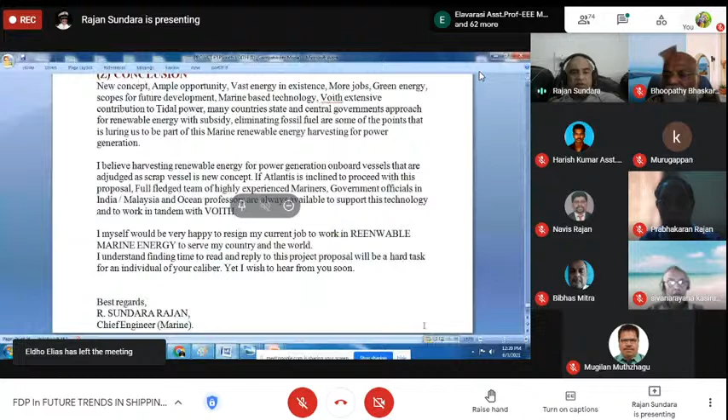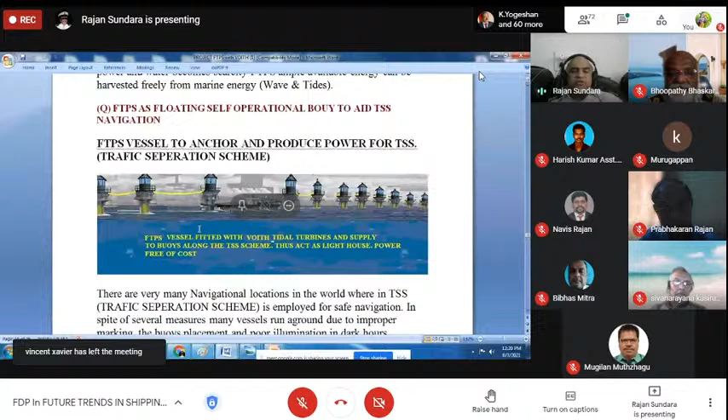This is what the aim is for future navigation also. We can have the scrap vessel of a passenger vessel converted into a hotel. This is also possible using such turbines to produce huge amounts of power. It is not that this is going to be future technology - there are power systems already being executed with this sort of turbines. You can see how much megawatt power is being drawn using these turbines and propulsions, which will be of greater advantage in future marine industry.

Then I would like to show something here. Electrical propulsion.

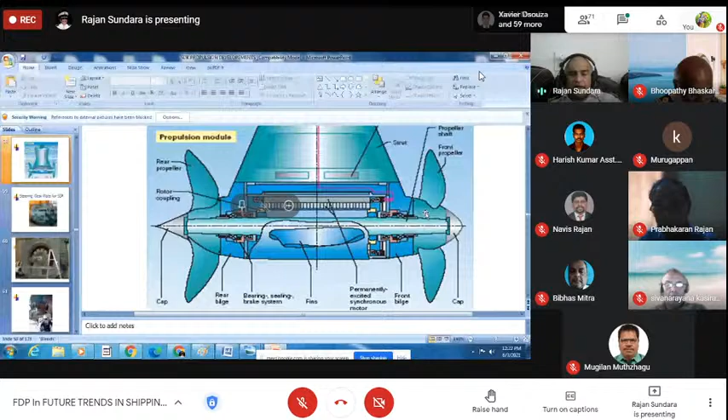This is the power I have shown you. One more thing I wanted to show here - the advantages of another propulsion system. You can see this here. What is that power here? The motor, electrical energy, brake system, everything is confined to a small area. This is the future, and you can see how the power is going to come from 3 or 4 diesel engines through the center, and we have propellers on either side operated with the Azipod controlled pitch propeller system. This is the future propulsion system, and it's going to give a lot of energy also.

This is the new injection system - water jet propulsion, as I told you already. Here you can see the axial flow, like a scoop system. Whenever you've seen in a ULCC or VLCC, we draw water by this scooping system when the ship is sailing. Whenever we are at speed, we stop the motor for the cooling system, and by the scoop itself it is going to cool the condenser.

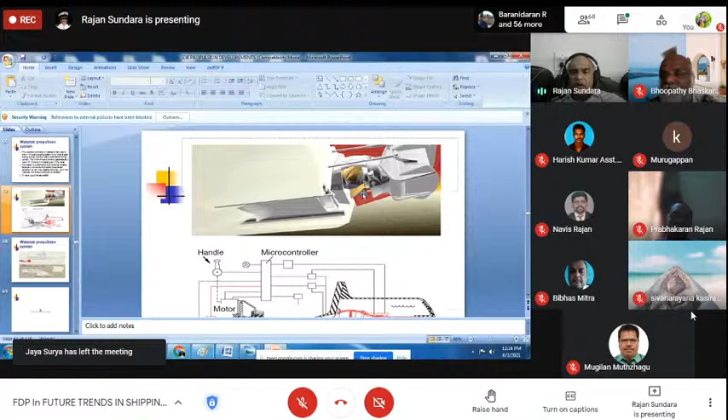Similar to that, by scooping, this axial flow pump creates enormous thrust, and that thrust is converted through a nozzle, giving the power which jets through the stern of the ship, providing thrust. This water jet propulsion is going to be enforced for all cruise ships as well as ferrying boats. This is an added advantage because there's no pollution, no noise, no turbines, no engine - only a pump to run which is below the ship under the water.

This is the water jet propulsion, clearly stating how the pump works, how it's driven by a simple electrical motor, and this is the scoop method - the intake grid, everything is here. You can see clearly. The pump is there, called axial flow pump. There is no suction head, no discharge head - it's just taking water from the sea and thrusting it out, and that is how it operates.

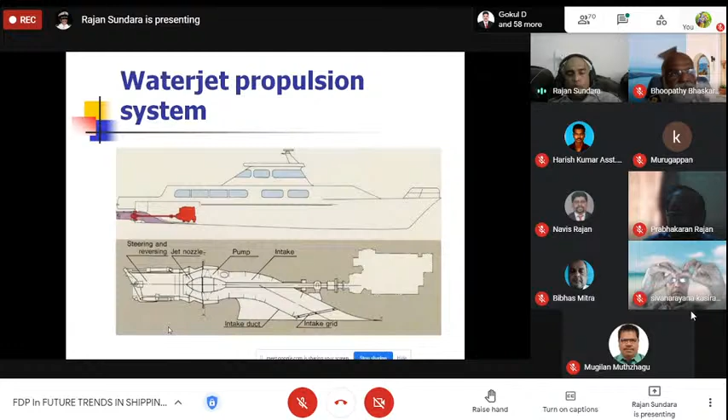I showed you this water jet propelled system. The same thing is here, showing how the nozzle turns the ship port and starboard, and how it goes astern. It is a simple mechanism, and if we put 3 or 4 of these, it can drive a ship of 60,000-70,000 tonnes also. This is another way of giving a luxury propulsion system for cruise ships.

And you can see how they are turning also. These are called the buckets - they are kept and operated by actuated drives. This is the water jet propulsion system, which will maneuver the ship in the same location within a very small basin. We can turn the ship excellently.

If this would have been there, we should not have had the Suez Canal accident also. This sort of propulsion will be of great help and can be used in shallow waters also - that is what shallow water propulsion is about, and this is what I wanted to explain. There are a few more electrical propulsion systems, which I don't know where I put that material.